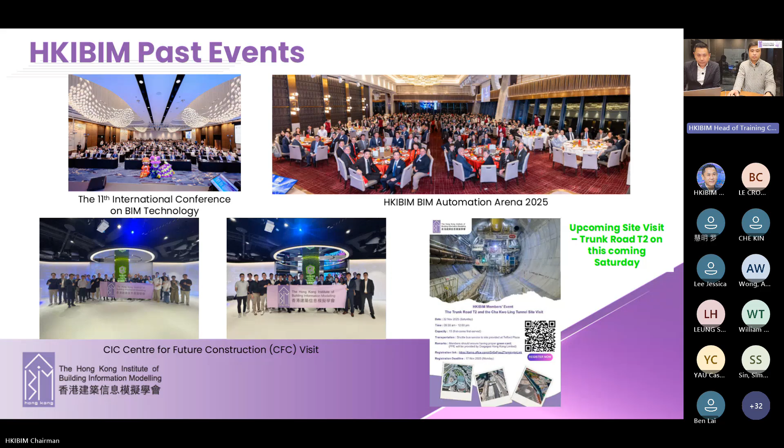I was in Seoul, Korea last Friday, where I made congratulatory remarks at the Korean Institute of Building Information's 2025 International Symposium. The conference was themed 'Beyond Smart: The Rise of Intelligent Constructions.' At that conference, we signed an MOU between HKIBIM and the Korean Institute of Building Information, hoping to do more collaborations between the two regions. If any members have great ideas, do let us know, drop me an email.

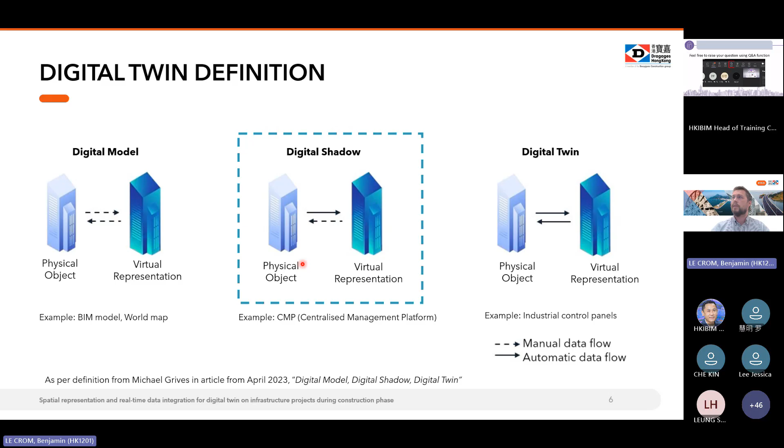What is important to define is the stage of the project or the structure. Most of you probably work on the conception phase, ideation, planification of the structure. In this case, usually the physical object doesn't even exist yet, but you are working mostly on the virtual representation that might change along with the design process.

We also want to differentiate from the exploitation phase, where the construction has been done already. We are more on the performance of the structure and the maintenance of it. Usually the physical object is finalized and the virtual representation is mostly fixed for the purpose.

For us in construction stage, it's a bit more complicated. We are in application of the design, the realization of the structure. Usually the physical object is changing on a daily basis. We are creating this object. The virtual representation might change as well based on the different change of design and even on the state of the project.

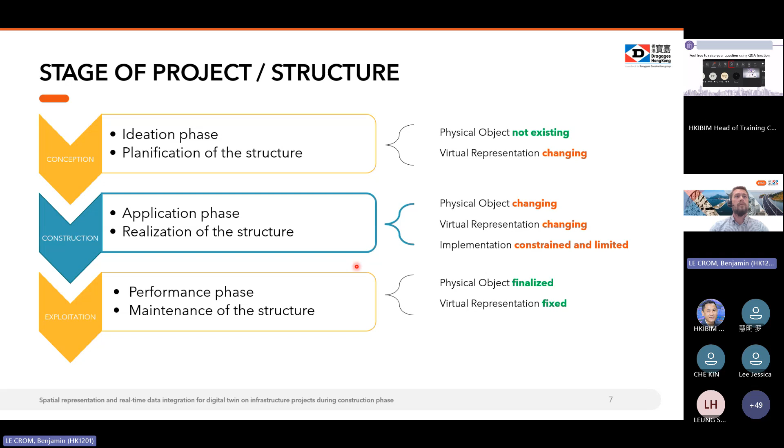What is important as well is the implementation here of the digital twin is constrained and limited, because we are very limited in time and obviously economically quite constrained in our construction industry, but with more and more interest in Hong Kong.

One thing I want to highlight as well, the different users for this phase of the project. We have technical, construction team, inspectors from our clients, and all the support departments. What they would usually want to see in a digital twin is the change of the virtual representation based on the physical object built, mostly technical.

We want to compare the virtual representations that we are planning with the physical object built. We want to coordinate over the latest representation of the physical object. And the last part is quickly identify the current state of the project and localization potentially of sensors or people. So this is the kind of use cases that we have on this kind of digital twin.

Then those definitions bring some constraints and requirements on our virtual representation. Frequency, we need to be able to adapt to physical object changes. We don't need to change this representation every day, but we need to bring some new physical representation, virtual representation, as much as possible.

Here, as we are using virtual representation as a support for visualization, we want to aim for the good, not the best. So we need to be pragmatic in the way we do it. It has to be functional, easy to understand and interact for users. The users I just described are not necessarily technical people.

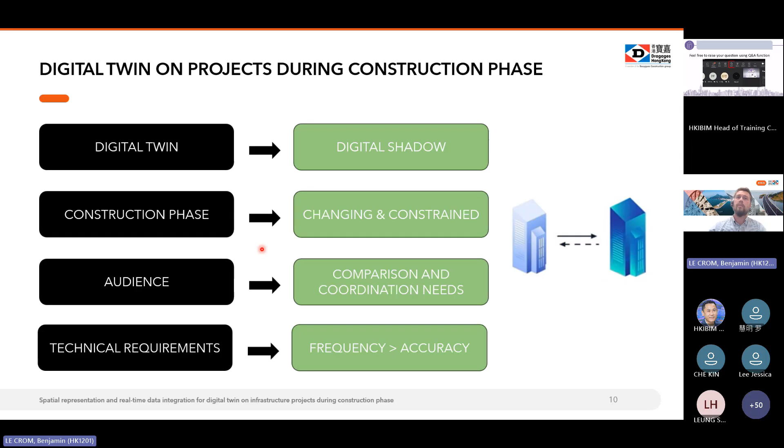So for the different technology now for real-time monitoring, I want to introduce the smart site safety system that has been introduced since 2023 in Hong Kong by the Development Bureau. The goal is to promote the adoption of advanced technology to reduce accidents and fatalities in the industry, so very focused on the safety part.

Deployed in 2023, it has been reinforced by the CITF, the Construction Innovation and Technology Fund, in the same year. And recently in 2024 we had the 4S labeling scheme to support and witness the deployment of those technologies on the project, as well as what we call the CMP, Centralized Management Platform, which is in a sense the digital twin we are talking about today.

On top of those requirements from the governance, we might also have some contract requirements. We are now with clients like MTR, where this project has been made. We are becoming more and more mature in technologies and their requirements.

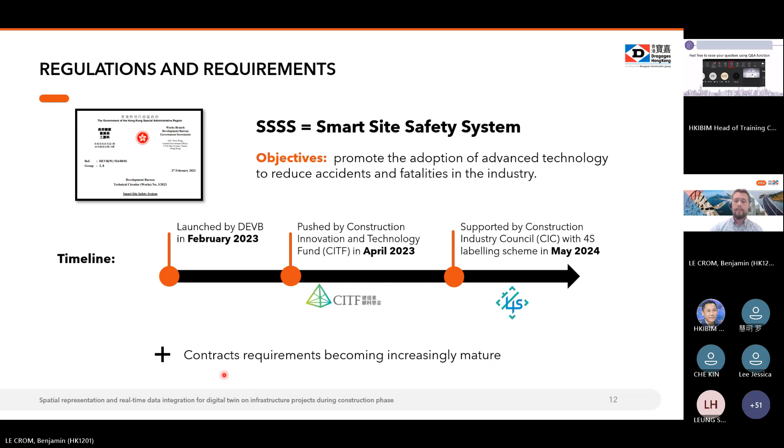So the different components we are going to talk about today: a deployment of a lot of smart safety devices, IoT, CCTVs, AI cameras, applications, etc. We usually have what we call a communication network, so data ingestion, reformatting, standardization, consolidation. And finally the important output: the alert on site, as we are mostly working on a safety system, the digital twin, and some KPIs.

These are usually on an online platform for actionable, interactive access. So those are the three main components, and I will go in more detail during the presentation.

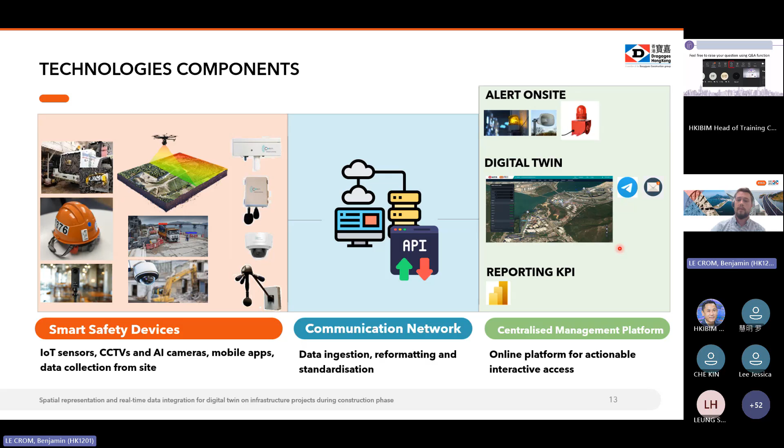Usually I focus more of my presentations on defining all those smart safety devices. I believe for today this is not the focus, but it's going to be important for explaining why we have made such choices. So obviously we have a part which ensures a spatial representation of our project: what we put in place, CCTVs, AI cameras, and all the alert management coming with it.

We also push more and more on the project the attendance and geolocation, especially for a project which has confined spaces, such as a tunnel. We are also now having plant tracking, smart padlocks, smart watches on the project to track people and plants, many environmental and geotechnical sensors, and new e-permits, plant certifications, spoil management, etc.

So those are now the smart site safety devices that we are pushing on site, which need to be supported by the virtual representation to easily read that information.

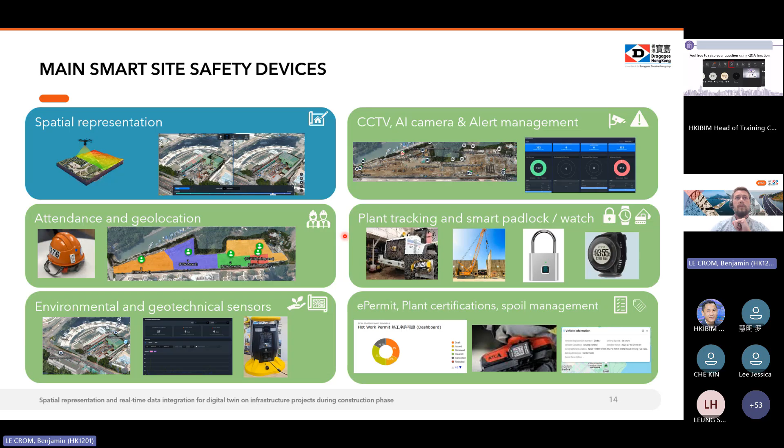I want to talk about alert management a little bit because this is also the end goal in a sense. We are bringing a lot of sensors on site for a very good reason, to manage our project, and mostly for safety. So alert management is a very important part of it. Something we sometimes see on different projects is that delivery teams forget to focus on it, so it's important that we define the different types of alerts we can push on the project.

Some will be alerts to prevent on-site, as the one I showed you before, so those are alerts to expect immediate and remedial action on site. We have also alerts that we use as KPI, serving as follow-up. For example, when we have too many alerts, thousands per day, it's mostly a trend that we need to improve.

Alert as data usage, for example AI cameras gathering information about license plates to understand our logistics on site—these alerts are kind of used just as data for ourselves. And then I think the most important, and what we wanted to present also on the digital twin, is the alerts to manage: basically alerts that we are expecting a review and action from our different departments, such as environmental department and safety department, which is also reviewed with our clients to ensure we are putting the proper follow-up in place.

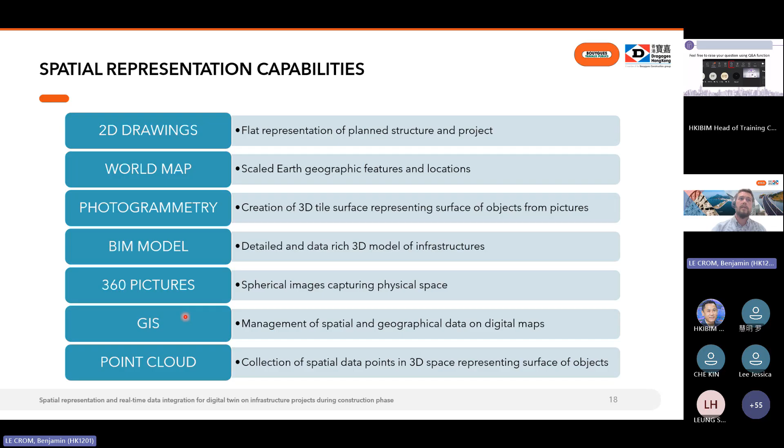So coming back to our main use cases, when we look at it in more detail, for example the CCTVs, in terms of spatial representation here, we only need to define the camera's physical location one time, and most likely it will be fixed for the rest of the project.

In attendance and geolocation, depending on the granulometry where we want to track people and plant, we can usually have an area definition that needs to be done on a project. For plant tracking, smartwatch, for example, we might even have historical locations, something a bit more precise, but that is moving and changing most of the time.

Coming back to environmental and geotechnical sensors, it's more or less the same use case as for the CCTVs. We are looking here at precise and fixed location.

And then for e-permit, plant certification, spoil management, usually those are graphic visualization; they don't necessarily need any spatial representation. For spoil management, we might follow the tracks on the project or even outside of it, where we would need historical location. And for the e-permit, we can attach those to either a pin location or even an area of the project.

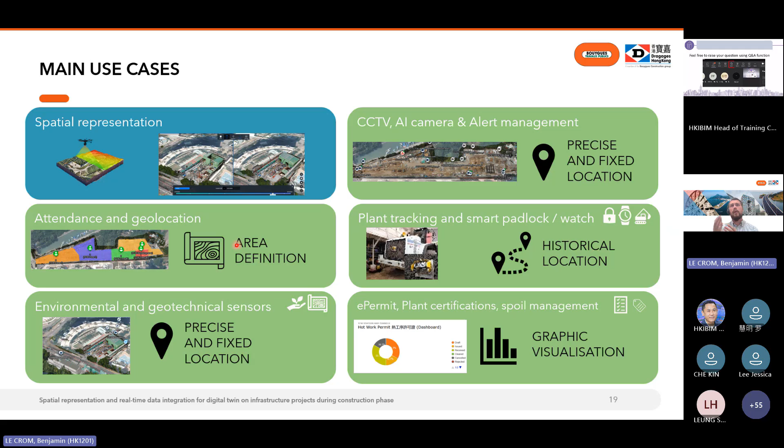So this is where our main use cases or our technologies are now linked with the spatial representation.

So based on the list of capabilities I just listed for you, we decided to focus more on the ones that are bringing quick value, especially in the context of a project construction phase where you can't deploy as much as you want, and also you want to focus on the ones that bring the most value for the project.

So world map, it's free, it's there. It's very helpful for us to locate the project within the world environment. It's also very interesting for us for large infrastructure projects, which span many kilometers. Maybe less useful for buildings, which are very limited in space.

Photogrammetry helps us display the latest changes of the project. Obviously a bit less powerful for the building part, as photogrammetry is very interesting to develop pictures on a very large scale area.

The BIM model displays the temporary and planned final structure. This is a mix, very interesting for our civil works project, but mostly important for building projects. 2D drawings display the planned environment. Usually we overlay those two to compare, for example, a site installation that was planned with the actual site installation on site. Then GIS, which we use in different ways, helps us create displays of areas or input information that doesn't exist in the sensor itself. For example, a sensor gives us information about its ID and actual readings, but doesn't necessarily know its location. We're not putting a GPS on every sensor, so GIS helps us define locations that don't exist in the object itself.

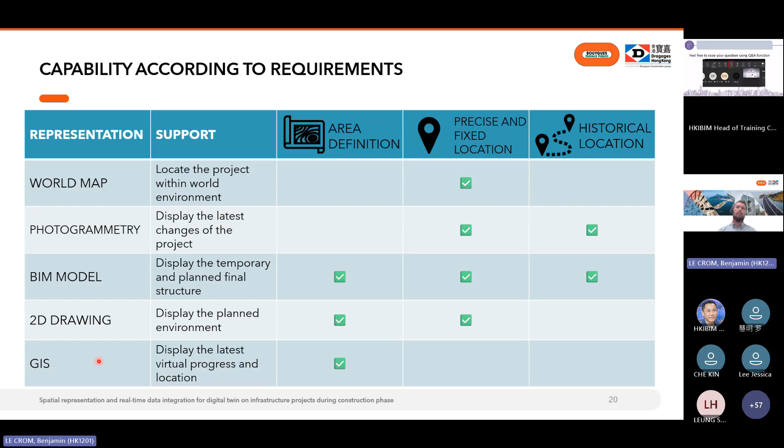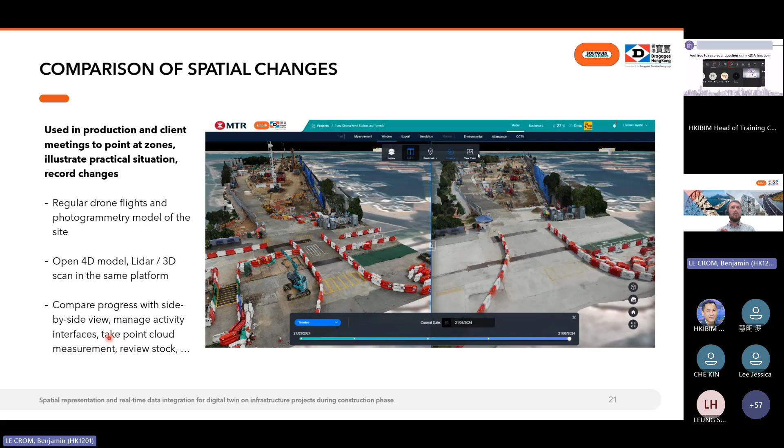I'll show you a few examples of spatial change comparison. What I'm showing here is the photogrammetry models we are using. On the left is the photogrammetry model from the beginning of the project, and on the right is one from a few months later. Thanks to a platform, we are able to compare both situations and see how the project has evolved. We might also bring in LiDAR or 3D scans for this visualization, but as I mentioned, what's important here is not accuracy but supporting visualization while staying light, so it can be easily opened on a web-based platform.

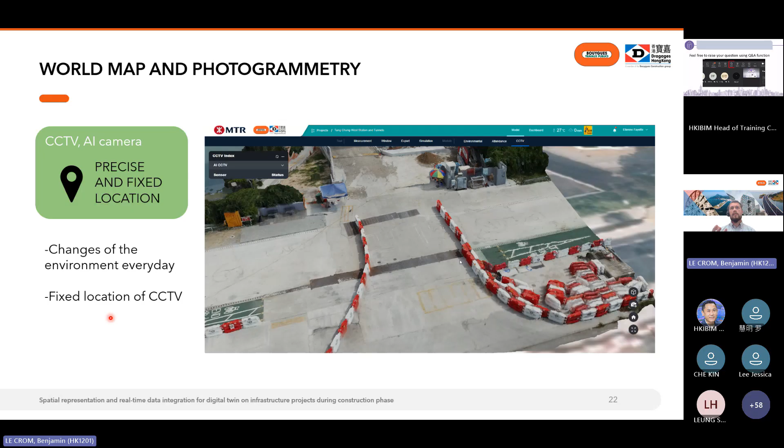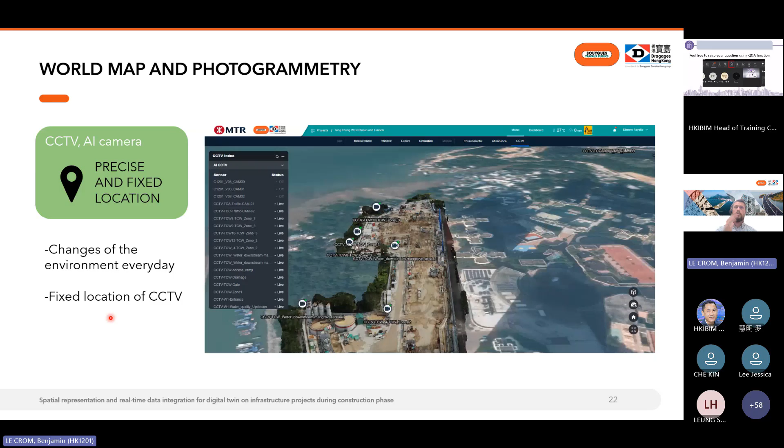So this is one of our use cases. Another use case, as I mentioned, combines photogrammetry with GIS to pinpoint the precise location of all the CCTVs on our project, distributed as we can see here in our station. The environment changes often, but the CCTV locations might not change that often during our project.

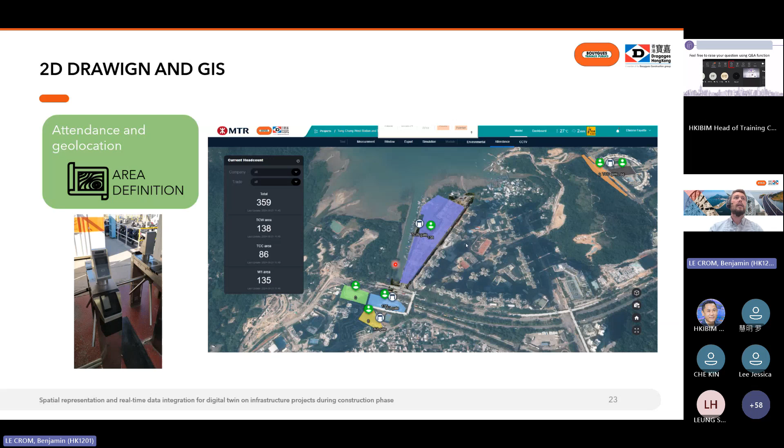Another use of GIS is to draw areas, as I mentioned before. We use our attendance module, with turnstiles at every access point to every part of our project, combined with geolocation information to define, for example, the number of people in each area.

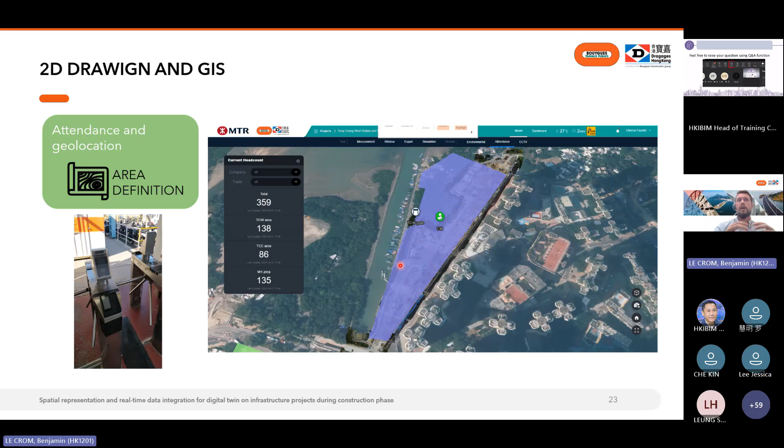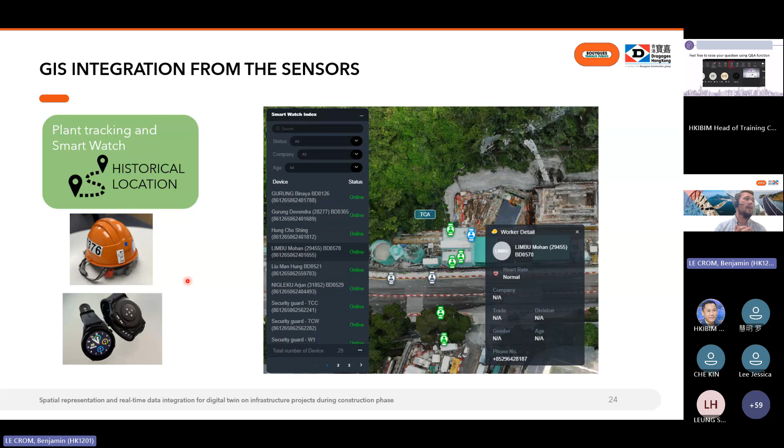This is a simple type of interaction. Another one covers GIS integration from the sensors themselves. A smartwatch, for example, might have GPS information of where it is, and we use this to feed information back to the platform and display the latest or historical location for all the different people we're tracking. This isn't necessarily the main focus, because it's mostly for safety - knowing if they're in good health and don't need any rescue anytime soon.

To come back to spatial representation as a support for visualization: we have many capabilities and possibilities, but we need to focus on the use cases. Here, we are not trying to be accurate - we want to use it as visual support. There are many changes in our project during this construction phase, so frequency and localization of our assets is very important to assess and be as efficient as possible, especially given the economic constraints of our project, where we're developing a lot of technologies for a short time - about 3 years. Whereas in the maintenance or performance phase of a structure, it's worth deploying more advanced or expensive technologies, since you'll probably have the structure for at least 10 to 50 years, making it worthwhile. So for us, we need to really focus on a very pragmatic deployment of our project.

To conclude on the approach and solutions we have deployed: we have used drone flight and photogrammetry models on our site, mostly for comparison. We also usually display the BIM model to compare, especially with 4D information, the timeline of what was planned in the design and planning phase against the reality of the project.

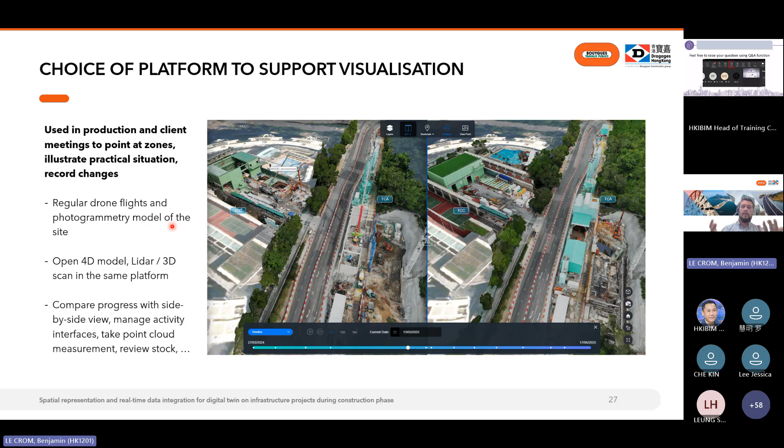We have the geotechnical teams focusing on all the sensors for tilting monitoring, etc. For environmental alerts, we have different types based on what we are looking at, such as air, water, and noise level.

But thanks to the technology, we are also looking at AI camera, which is enabling us to develop more use cases, such as detection of dirty wheels or dump truck covers, ensuring they are closed before leaving our site.

On our project, we are using AI camera at the entrance, at the turnstile area, for some PPE checks. We have deployed successfully the usual ones, helmet and vest detection, but we have also pushed a little further.

Now we are also able to detect when someone has their gloves or goggles on site, which is compulsory for us. We also have AI camera for trespassing, to ensure people are not going through vehicle access.